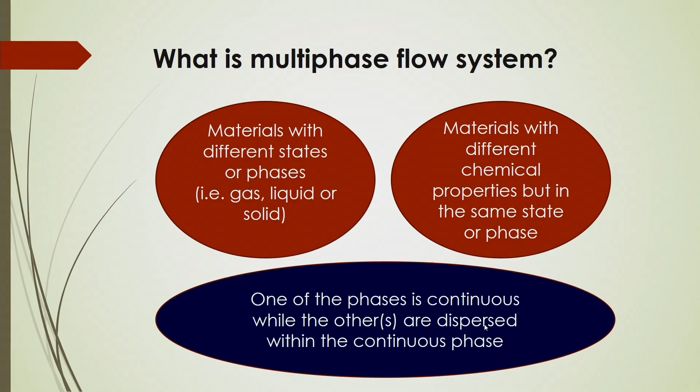In this case, remember that whenever we process any chemical engineering system where multiple phases take part, one of the phases is continuous while the others are dispersed within the continuous phase. For example, if gas is dispersed in a continuous liquid phase, then gas is the dispersed phase and liquid is the continuous phase.

In gas-liquid processes like absorption or gas-liquid reactions, these two phases take part. But if these two phases occur in the presence of a solid catalyst, then there will be a three-phase flow.

In that case, two phases may be discrete, like gas and solid particles, whereas liquid will be the continuous phase. So in any multi-phase flow system, one phase should be discrete and another continuous. We can divide multi-phase systems into two-phase systems and three-phase systems.

Two-phase systems are not only gas-liquid; there are others like liquid-solid and even gas-solid systems. So two-phase systems include gas-solid, liquid-solid and gas-liquid, while three-phase systems are gas-liquid-solid. Gas or liquid acts as the continuous phase in particular processes, while gas or solid acts as the discrete or dispersed phase.

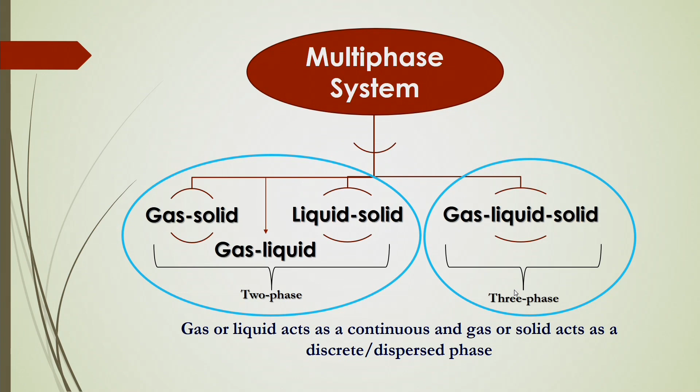Sometimes if liquid is sprayed as a dispersed phase of droplets in a gaseous medium, then liquid droplets are the discrete phase and gas is the continuous phase. So gas phase may be either continuous or discrete depending on the application. Let us look at some applications of these different multi-phase flow systems.

Gas-liquid flow systems: here gas is used as the dispersed phase and liquid as the continuous fluid, such as absorption of gas in liquid to remove it from a gaseous mixture. Example: mixtures of COx, NOx or hydrogen sulfide etc. from polluted air into a solvent.

Other examples include ozonation of arsenic to arsenate, or removal of ammonia or dye in water treatment. Gas-liquid operation is important here, along with other applications like gas-liquid chromatography for analysis of liquid petroleum fractions, where both gas and liquid take part in the analysis.

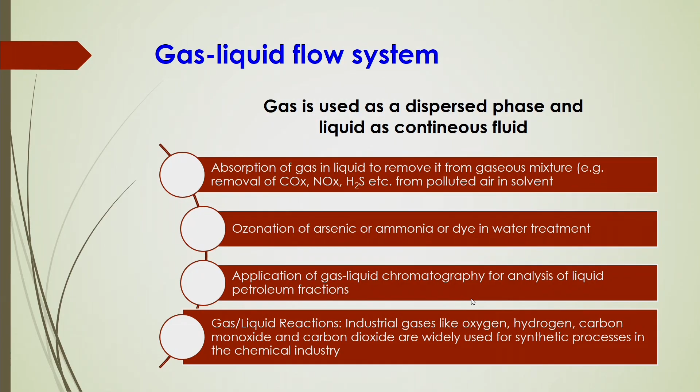Even gas-liquid reaction processes use industrial gases—oxygenation, hydrogenation, carbon monoxide and carbon dioxide processes—which are widely used for synthetic processes in the chemical industry to produce different types of hydrocarbons. So gas-liquid systems are important.

Liquid-gas systems: here liquid is used as the discrete fluid and gas as the continuous fluid. For example, in a spray column, liquid is sprayed into a gaseous medium for absorption of gas, and spray towers can be very effective in removing pollutants if the pollutants are highly soluble in the liquid.

Also, in the production of superphosphate used in manufacturing fertilizer, liquid is used as a discrete phase, and in the production of silicon tetrafluoride and hydrogen fluoride, gases are vented from various points in the process—these are gas-liquid operations used for producing superphosphate fertilizer, silicon tetrafluoride and hydrogen fluoride gases.

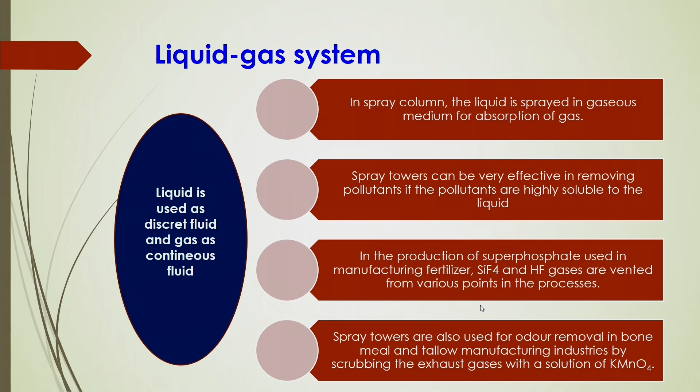And the spray towers are also used for odor removal in the bone meal and tallow manufacturing industries by scrubbing the exhaust gases with a solution of potassium permanganate. So, these are some applications where liquid and gas will be taking part. In that case liquid will be the discrete and gas will be the continuous phase.

In the gas solid system, you will see there are several applications. In chemical engineering processes, it can be said that gas solid operations are the most important and diverse applications in the chemical industry. There are several processes, like physical processes and even some reactive processes, gas solid reactions. In physical processes like drying of particles, fluidization operation is very important.

Coating of surfaces, granulation, even heat treatment, and also filtration, blending and segregation or classification of the solid particles in fluidized bed. So, these are actually gas solid operations. Also in gas solid reactions like roasting of ores, combustion of coal to produce different types of hydrocarbons, even for power plant operation to produce the power.

Of course, this coal is combusted and different types of gaseous products are coming out, and those gaseous products are separated and used for several purposes. Sometimes steam is produced just by burning coal, and that steam is used for the production of power by rotating the turbine. So, in that case gas solid operation is important, and also calcination of limestone, phosphates, even aluminum hydroxide, fluid coking etc. For that these gas solid operations are very useful.

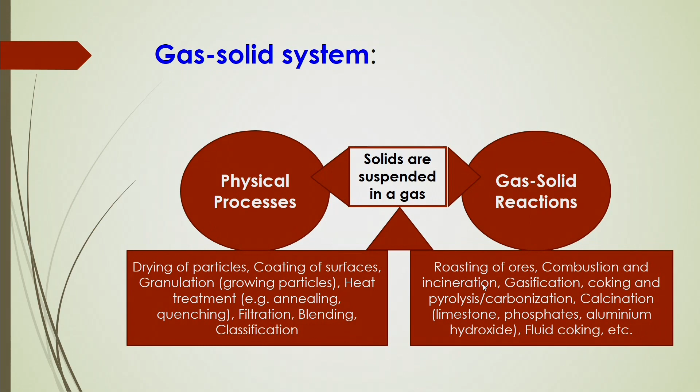And also the liquid liquid system, there are several applications for this system also. Liquids are used as both discrete as well as continuous phase, like the flow of emulsion of oil and water in pipelines. Different types of contactors like packed beds, packed columns, pulsed columns, and stirred tank reactors in various applications where liquid liquid systems are important.

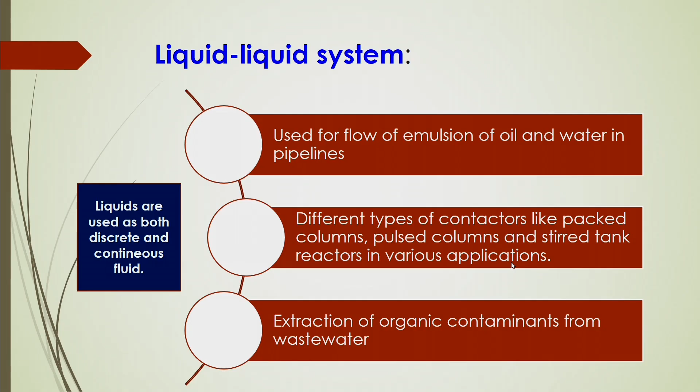Also liquid extractions, solvent extractions to remove the contamination from the wastewater, the extraction of the contaminants by another liquid component or organic liquid, that is also important. So, liquid extraction is also important just to remove some contaminants from the wastewater or some other liquid medium where it will not be useful.

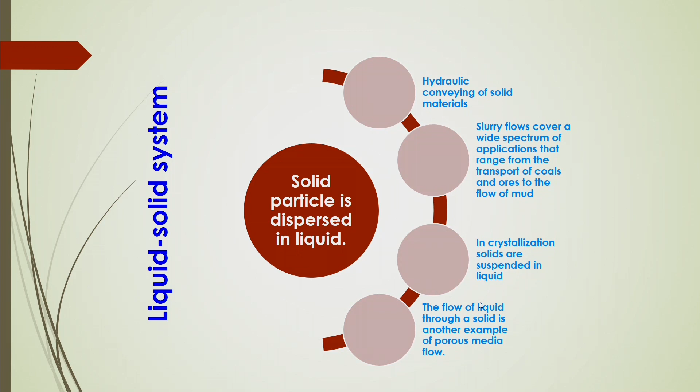And the liquid solid system, where hydraulic conveying of solid materials is important, and in that case solid particles are dispersed in liquid, and slurry flows cover a wide spectrum of applications that range from transport of coals and ores to the flow of mud. And also in crystallization you will see solids are suspended in liquid, and the flow of liquid through a solid is another example of porous media flow. So, these are the operations for the liquid solid system.

In three phase systems you will see gas liquid solid systems. In the mineral industry, flotation is one of the important processes by which valuable metals will be separated from the ores. During that flotation, aeration is being done, and during that aeration gas, liquid and solid, all three phases will be taking part.

And also sometimes some fine particles are to be removed from the muddy water, or milk water, where solid particles are suspended. To separate those fine particles, this flotation process is also important. In that case surfactants, frothers are to be used, so that in flotation these fine particles will be separated by aeration. So, in that case gas, liquid and solids, three phases are taking part.

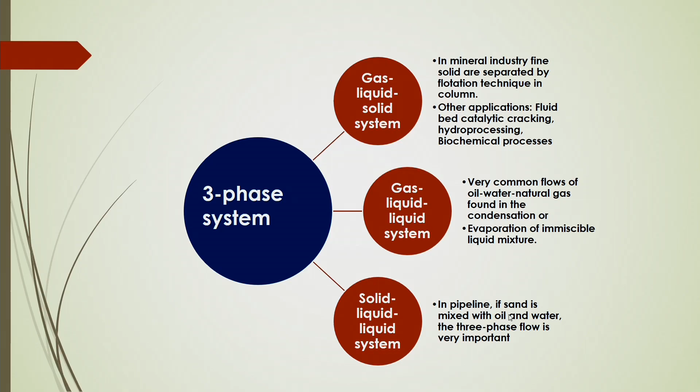Other applications like fluid bed catalytic cracking in presence of catalyst particles, hydrocracking, hydroprocessing and biochemical processes are involved in three phase systems. And very common flows of oil, water, natural gas are found in condensation or evaporation of immiscible liquid mixtures. There also gas liquid liquid systems are important, and solid liquid systems you will see in pipelines. If sand is mixed with oil and water, the three phase flow is important there. So, these are the various applications of the three phase systems.

And four phase systems also, one application is the freeze desalination process. When butane liquid is added into saline water, that results in formation of ice crystals, and in this case the system is a mixture of butane liquid, water, ice and butane vapor.

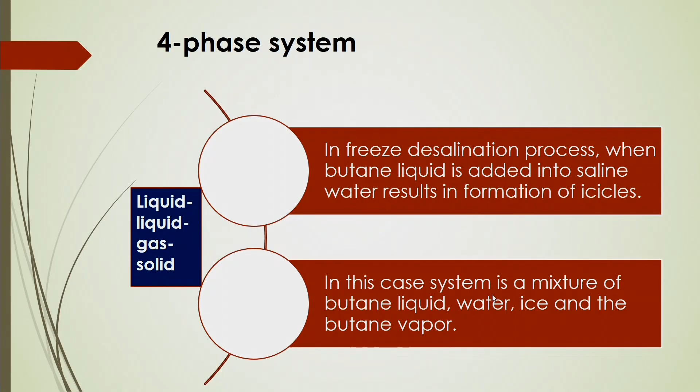These four phases are there, so that is why four phase systems are considered. So, we have then seen different applications of four phase systems in our daily life. Whatever products we are getting, all processes by which these products are coming out are related to multi-phase flow systems, whether it is gas liquid or liquid solid or gas liquid solid system, even gas liquid solid and vapor system; all are directly or indirectly related to their particular processes.

So, based on these multi-phase flow processes, whenever we are going to perform these processes in a particular unit, that process can be intensified based on the development of the unit or equipment, or based on the fundamental phenomena, even the fluid phenomena, based on the equipment size, based on the policy. So, we can intensify the process in different aspects. So, in this lecture we will discuss, based on these multi-phase flow systems, the different mechanisms of process intensification which are being used in industry.

So, flow based process units for intensification: some important chemical engineering process units for process intensification are like the trickle bed reactor, where liquid phase and gas phase are flowing through the packed bed, and the liquid phase will be flowing as a laminar stream, called trickle phenomena. So, that is the trickle bed reactor. In that case you will see plug flow phenomena, and then reaction efficiency or process performance will be higher than the conventional processes.

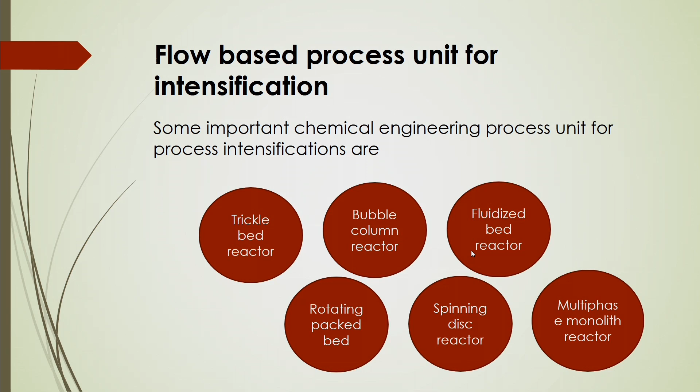So, these are the various process equipments for process intensification which are being used in chemical engineering processes. And you will see flow based process units for intensification, like heat integrated reactors; for high temperature, millisecond contact time and catalysis are also important for this process intensification. Micro engineered reactors are being developed nowadays for chemical engineering processes. Monoliths as biocatalytic reactors are developed as a process intensification.

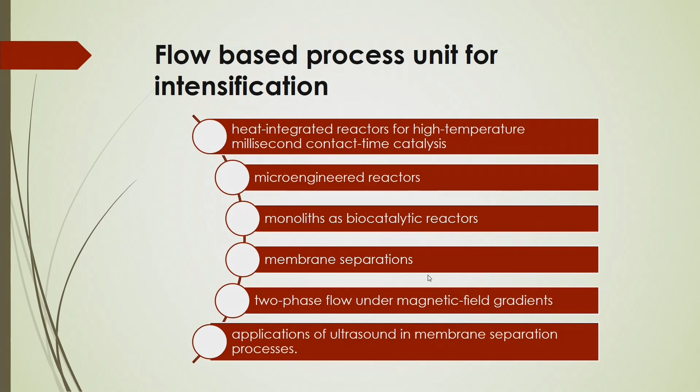Membrane separations nowadays are widely used in chemical engineering processes for separation of particles. Even nano sized particles are being separated by these membrane separation processes. So, this is also one important intensified process. Two phase flow under magnetic field gradients is also important there. Applications of ultrasound in membrane separation processes are nowadays in the research stage for chemical engineering processes.

Various mechanisms, like slurry bubble column reactors, create more interfacial area between phases to enhance the mass and heat transfer. So, the slurry bubble column reactor is one important process intensified unit based on the multi-phase flow system. Fluidized bed reactors give better heat and mass transfer in gas solid flow, and also rotating disk packed beds give better mass transfer, well mixed liquid and gas phases, high interfacial surface area, and you can even operate them in counter current mode. So, these are some basic mechanisms based on which multi-phase flow process intensified units are developed

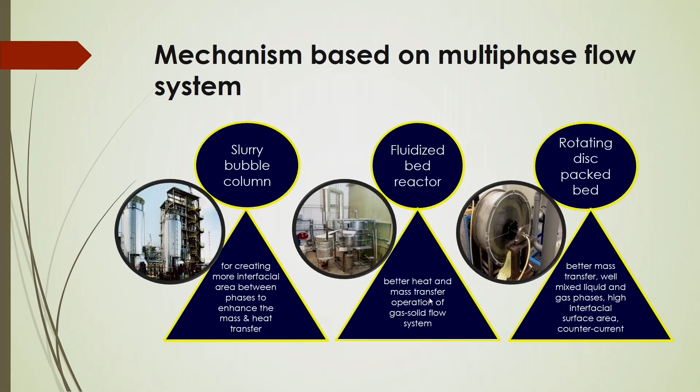for chemical engineering processes. You will also see compact heat exchangers, where reducing channel size gives better power generation. By surface enhancement with metal coated polymer foam for micro power generation, foam heat exchangers are developed, and based on increased residence time and better phase mixing, downflow or inverse flow reactors are nowadays coming to get more contact time and more residence time of the phases in the reactor.

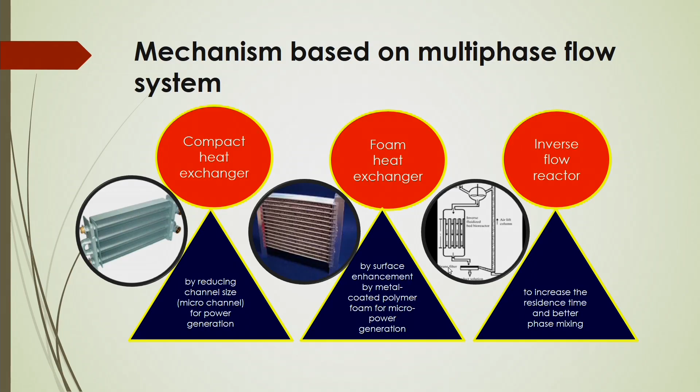Membrane distillation is one of the important integrated systems where the transport mechanisms are Knudsen diffusion, Poiseuille's flow and molecular diffusion. All these processes happen simultaneously, and the thermal boundary layer is considered to be the mass transfer controlling factor in this membrane distillation process. Liquid membrane systems are also important, where diffusion is enhanced in liquids rather than solids. Transport rates are several orders of magnitude higher than in solid membranes, because diffusion is faster in liquids compared to solids.

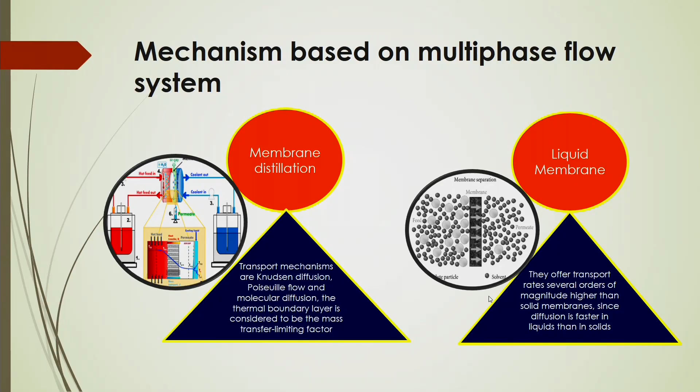Reactive separation is also important nowadays, because in fluid systems reaction and separation are combined in a single unit, and chemical process industries follow this integrated system to have favorable economics for carrying out reaction simultaneously with separation for certain classes of reacting systems. Many new processes called reactive separations are carried out, like methyl acetate production, where both reaction and distillation happen in a particular column.

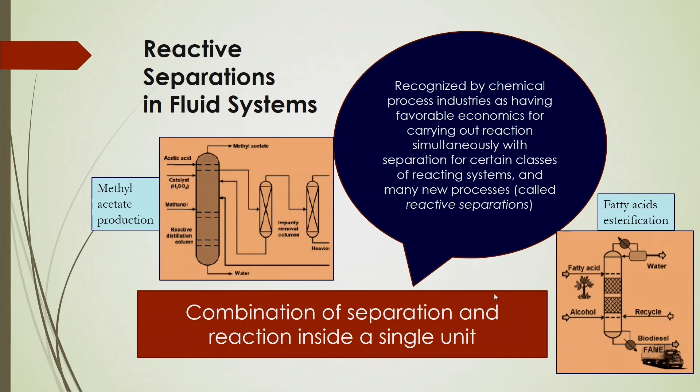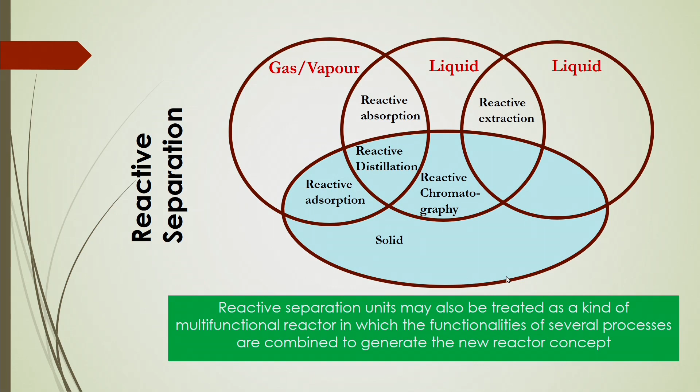So, you can say that in multi-phase flow systems, different chemical engineering processes can be intensified for a particular reaction based on a combination of unit operations, like reactive separation, reactive distillation, reactive extraction. And the feasibility of the reactive separation depends on various parameters like mechanical design, chemical reaction, and even separation performance.

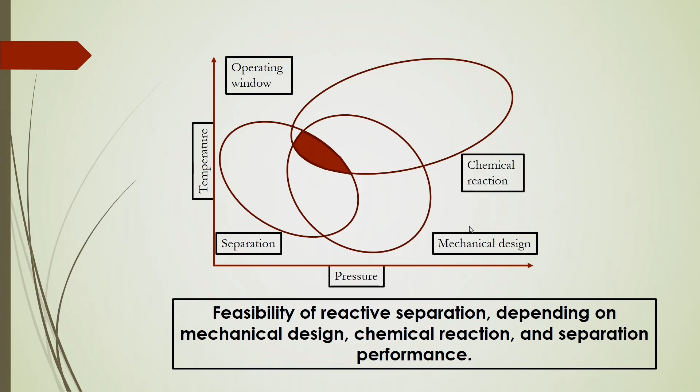So, in this diagram you will see, at a particular temperature and pressure, how chemical reactions are taking place for a particular process intensification, and how mechanical design will give you process intensification for that particular operation. So, we can say that any reactive separation process depends on mechanical design, chemical reaction performance, and separation performance.

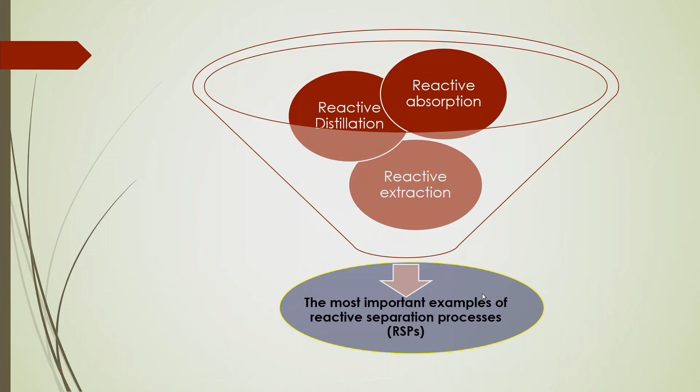The most important examples of reactive separation processes are reactive distillation, reactive absorption, and reactive extraction. A common feature of reactive absorption, distillation, and extraction is that these processes involve at least one liquid phase, the properties of the liquid state become significant, and they occur in moving systems. Thus, the process hydrodynamics play an important role, because all the process performance depends on the mixing processes,

and other particle interactions, like gas bubbles and solid particles, solid-solid interaction, gas-particle interaction, and bubble interactions like bubble coalescence and bubble breakup. If you have more breakup of the bubbles, you can produce finer bubbles, so that you get more interfacial area. If your process is more prone to bubble coalescence, performance will be less.

So, you have to design a unit in such a way that some mechanical provision is placed, so that breakage of the bubbles occurs, the bubble flow is uniform, and interfacial phenomena are created so that there is uniform mixing and distribution of the phases, giving better performance of the reaction and processes. So, the properties of the liquid state also become significant there.

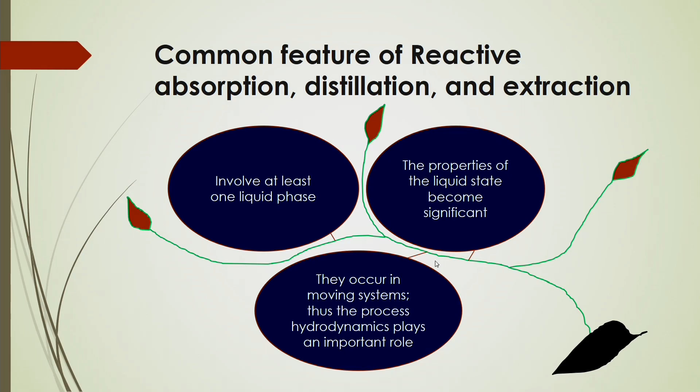So, the properties of the liquid state should be considered for that particular process intensification, and how to control the hydrodynamics. If there is a heterogeneous mixture, to make it homogeneous and get better performance, you have to make provisions. Sometimes, to reduce back mixing, you have to use a baffle, or design the unit as 2-dimensional, or use a microstructured system, so that back mixing will be reduced.

So, to get reduced back mixing, you can intensify the process just by operating it as a plug flow reactor, because plug flow will give you better performance of the reactions and other physical operations. These processes, the reactive separations like absorption, distillation or extraction, are based on the contact of at least two phases.

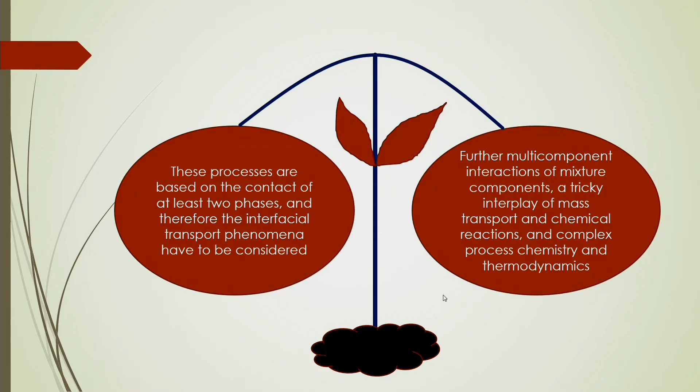So, for mass transfer through the interfacial area, of course two phases should be involved, and therefore the interfacial transport phenomena have to be considered for your process intensification. And also the multi-component interactions of the mixture components, a tricky interplay of mass transport and chemical reactions, and complex process chemistry and thermodynamics should be considered. Those are involved in that particular process intensification.

Now, let us consider some features of reactive distillation. There are complex interactions between chemical reaction and separation based on the phases, and the performance is influenced by the size and location of the reactive and non-reactive column. Also, reflux ratio is one of the important parameters, along with feed location and throughput, by which you can change the hydrodynamics in the column for the reactive distillation system.

Like esterification and hydrolysis reactions which are catalyzed by acidic ion exchange resins like Amberlyst 15, one of the important resins, in which reaction as well as separation happens in a particular unit.

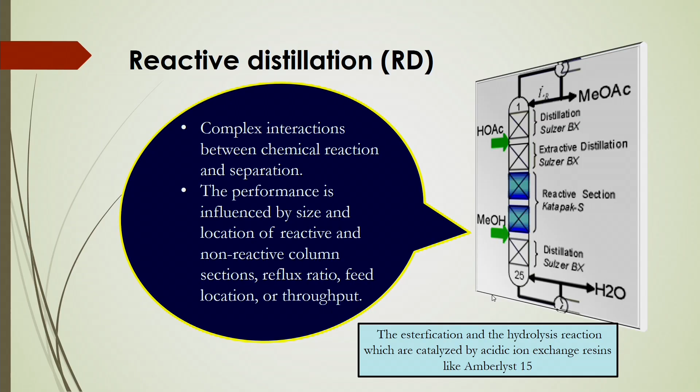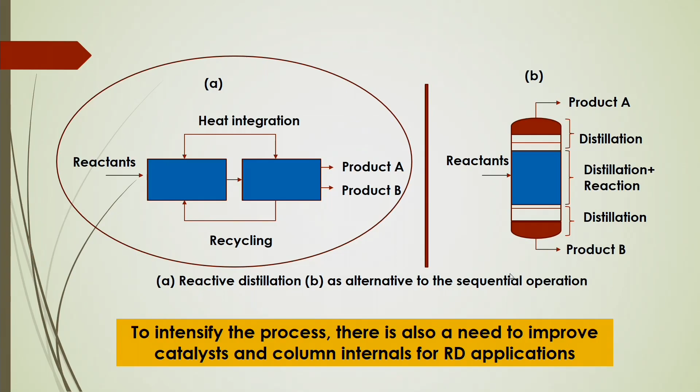So, in that particular unit, in some zone distillation and reaction both happen, and after that the distillation process happens in that unit. So, to intensify the process, there is also a need to improve the catalyst and column internals for reactive distillation applications.

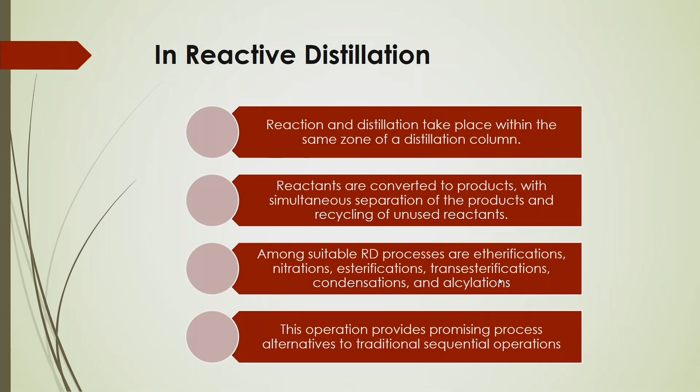And reaction and distillation take place within the same zone of a distillation column, and reactants are converted to products with simultaneous separation of products and recycling of unused reactants. Among suitable reactive distillation processes, etherifications, nitrations, esterifications, transesterifications, condensations and alkylations are the most common applications. This operation provides promising process alternatives to traditional sequential operations.

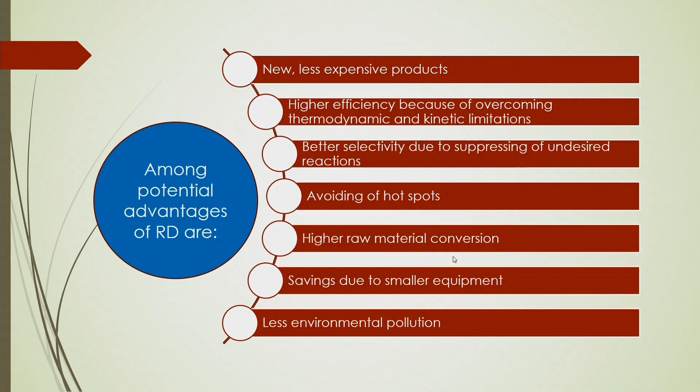Now, what are the advantages for which reactive distillations are carried out in a single unit? Less expensive products, avoiding hot spots, savings due to smaller equipment, less environmental pollution, higher efficiency because of overcoming thermodynamic and kinetic limitations, and better selectivity by suppressing undesired reactions. These are some potential advantages of the reactive distillation system.

In case of reactive absorption, here is an example: carbon dioxide absorption in liquid. Suppose air and carbon dioxide mixtures are supplied from the bottom of a packed bed reactor. Water and sodium hydroxide solution is used as the liquid, and through that liquid in the packed bed the air plus carbon dioxide mixture is supplied. Parallelly, reaction as well as absorption happen, giving sodium carbonate and water, and the air comes out from the top of the packed bed as clean air.

So, if we use sodium hydroxide for absorption of carbon dioxide, reaction as well as absorption both happen. Sodium hydroxide and carbon dioxide react to give sodium carbonate solution, and that sodium carbonate will be used for other applications. So, the scrubbing of carbon dioxide happens from this air carbon dioxide mixture, and clean air comes out from the top of the column.

Even for absorption of stack gases like a gas plus sulfur dioxide mixture, to remove the sulfur dioxide, if you use calcium carbonate in a solid medium, calcium carbonate reacts with sulfur dioxide to give calcium sulphate, which is precipitated, and the remaining solution is reused, and carbon dioxide without sulfur dioxide comes out as a gas. So, you can purify that gaseous mixture of sulfur dioxide or stack gases by this reactive absorption.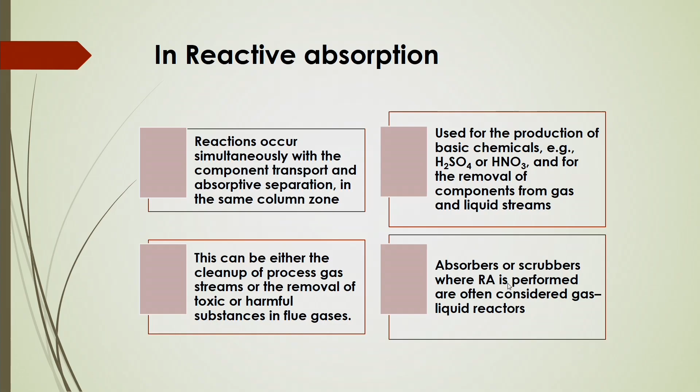So, reactive absorptions perform both reaction and absorption, and can be realized in a variety of equipment types: film absorbers, plate columns, packed units, and bubble columns. This process is characterized by independent flow of both phases, which is different from distillation, and this permits both co-current, like downflow and upflow, and also counter current operations.

This reactive absorption can be intensified either by absorber reactors or by designing different types of columns like plate columns, packed columns, bubble columns, even intensification of bubble columns in 2 dimensions and 3 dimensions, downflow bubble columns, bubble columns with baffles, and use of spargers to produce finer bubbles. So in that direction also you can intensify bubble columns.

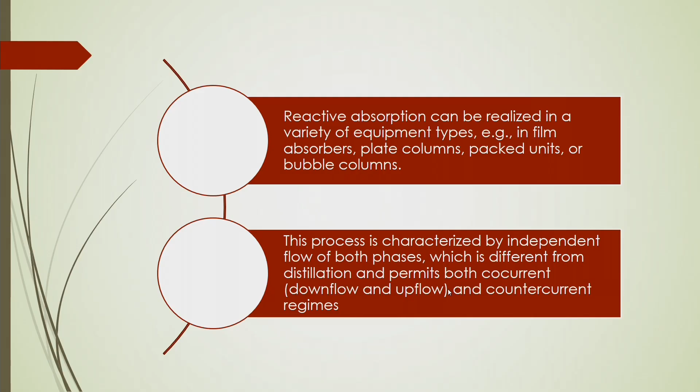This process can be characterized by different modes of operation. You can use a downflow system to increase mixing as well as residence time of the phases, and upflow systems where the first reaction is carried out. Countercurrent operations are also important where you see physical separation, or mass transfer operations for mineral processing.

Reactive absorption represents a process in which there is selective dissolution of gaseous species by a liquid solvent phase, combined with chemical reactions. Compared to purely physical absorption, reactive absorption does not necessarily require elevated pressure and high solubility of the absorbed components, because the chemical reaction shifts the equilibrium state favorably, resulting in enhanced solution capacity.

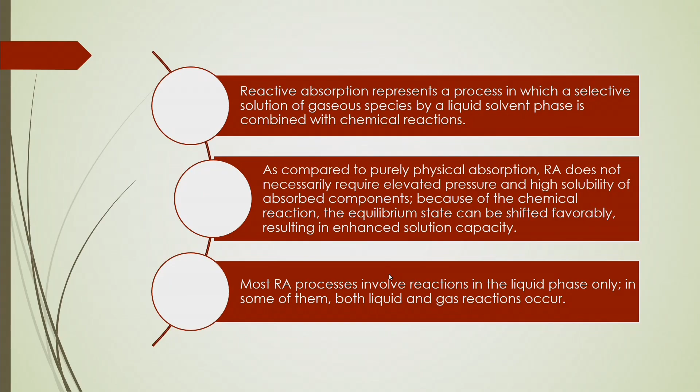Most reactive absorption processes involve reactions in the liquid phase only, and in some cases both liquid and gas act as the reaction medium. So the medium, the mode of operation, and discretizing the system are also sometimes ways to intensify the process.

In reactive extraction, both reaction and extraction happen together. This reactive extraction uses liquid ion exchangers that promote a selective reaction or separation, and the solutes are very often ionic species like metal ions, or organic or inorganic acids, or intermediates like furfural, phenols, etc.

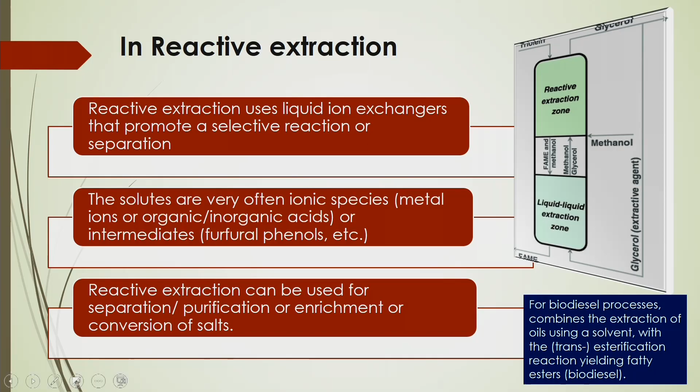Liquid-liquid extraction is sometimes based on the partial miscibility of liquids. So you have to derive some liquids where immiscibility will be present, but the separability capability of those liquids will be enhanced. Both immiscibility as well as the absorbance of contaminants in that particular liquid should be increased.

In the simplest extraction system, two compounds have to be separated, and this can be done by extracting with a carefully selected solvent in which one compound, called the solute, easily dissolves, whereas the other does not. As an example, propionic acid can be separated from water, or wastewater, using paraffin or an organic compound like octanol or decanol.

Decanol and water are immiscible, and propionic acid is miscible with water. So the propionic acid mixed in water can be separated by decanol. This decanol and water should be immiscible, and there should also be selectivity based on boiling point. You have to use organic compounds with a boiling point significantly different from propionic acid, so that after extraction, the propionic acid in decanol can be separated just by distillation.

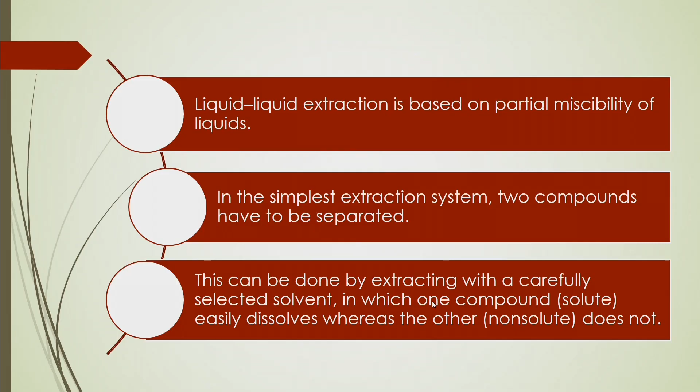This is related to the droplet phenomena - if you produce finer droplets, you get more interfacial area, so extraction will be more efficient and mass transfer will be better. This reactive extraction process depends on your design, and how to produce finer droplets and select the proper solvent.

To produce finer droplets, you have to design units like mixer settler systems, with mechanical provisions so that more turbulence and interfacial area are produced. Column extractions also help get more interfacial area between liquid and liquid for better extraction. Even centrifugal extractors are being developed for process intensification of extraction.

In centrifugal extraction, centrifugal force is applied to separate liquid contaminants into another liquid through the action of gyration, making a thin film of immiscible liquid, so that through that thin film, mass transfer is more efficient.

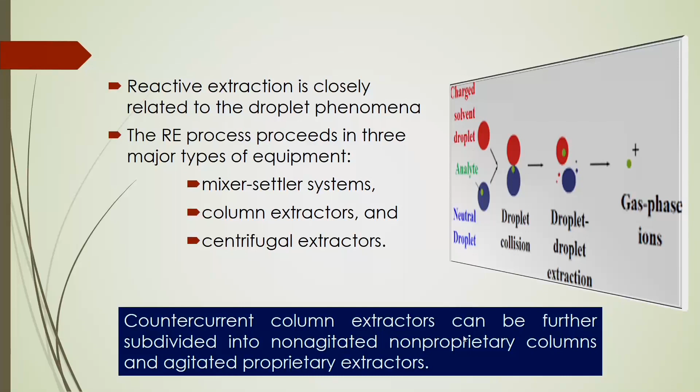Counter current column extractors can be subdivided into non-agitated, non-proprietary columns and agitated proprietary extractors. Counter current operations are designed economically so that without making droplets, you can increase extraction efficiency, save energy, and make operations easier to handle. This is why counter current column extractors are important for intensification of the extraction process.

In the extraction process, various forms of energy input are required, like rotation of propellers, impellers, disc propulsion, pulsation, vibration, ultrasonic devices, and centrifugal devices. To run this equipment for process intensification of extraction, you need various forms of energy.

Agitating the liquid-liquid system breaks it into droplets - using this energy you can increase the droplets and the interfacial area, so you get better mass transfer of extraction. Increasing droplets through this energy increases interfacial area to improve mass transfer and column efficiency.

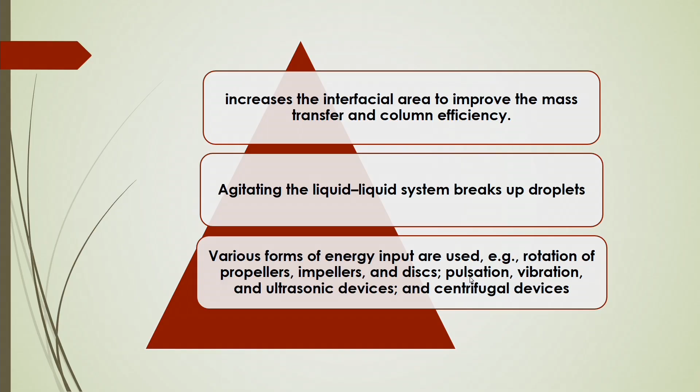Another important intensification process for multi-phase systems is the development of micro reactors and micro channel based heat exchangers. Multi-phase based micro reactors have potential for rapid heat and mass transfer. This enhancement of transport processes is related to the decrease of diffusion paths at the micro scale. For fast multi-phase reactions, these are very important, and the rate and selectivity of the chemical process can be greatly influenced by transport of reagents within the phases.

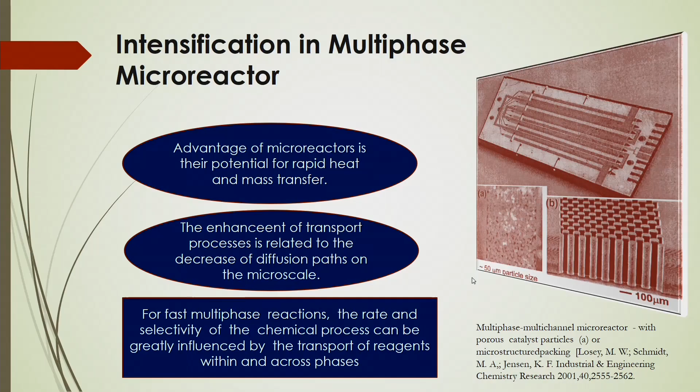A variety of different purposes are fulfilled based on the application and requirement of high heat and mass transfer coefficients in micro reactors. In micro reactors we get well defined flow patterns, whereas heterogeneous flow patterns with back mixing are sometimes seen in column reactors.

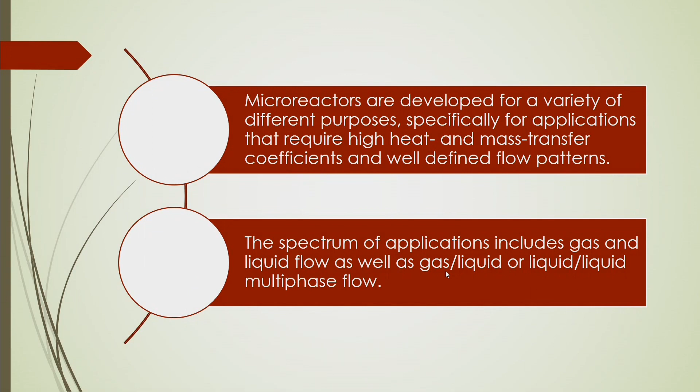Micro reactors are used to avoid back mixing. Micro channel based slug flow or plug flow patterns are the mechanisms used for process intensification. The spectrum of applications includes gas and liquid flow as well as gas-liquid or liquid-liquid multiphase flow systems in micro reactor systems.

So why this intensification from macro to micro reactor? When comparing processes in micro reactors with conventional systems, a few general differences can be identified: flow in microstructures is usually laminar, in contrast to turbulent flow patterns on the macro scale, and the diffusion paths for heat and mass transfer are very small, making microreactors ideal.

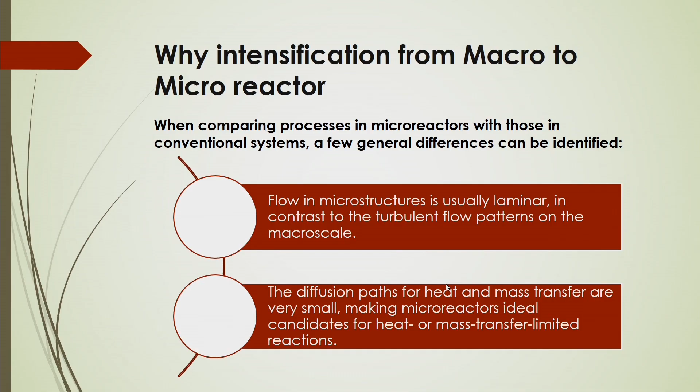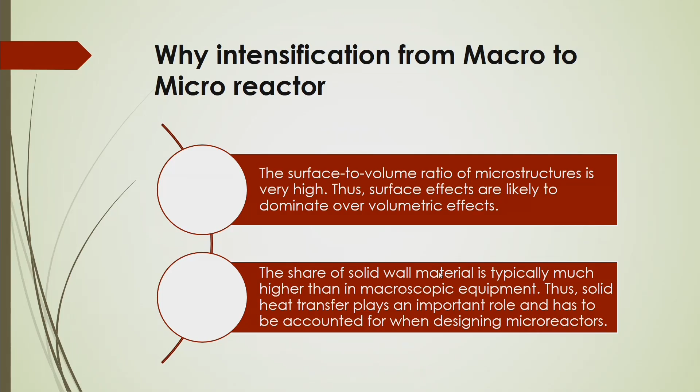Microreactors are very convenient for heat and mass transfer limited reactions. The surface to volume ratio in microstructure reactors is very high, so surface effects are likely to dominate over volumetric effects. The share of solid wall materials is typically much higher than in macroscopic equipment, so solid heat transfer plays an important role and must be accounted for when designing microreactors.

Using silicon microfabrication, it is possible to construct packed bed microreactors that provide a 100-fold or more improvement in mass transfer for gas-liquid heterogeneously catalyzed processes such as hydrogenation of unsaturated hydrocarbons. This is reported by Losey et al. in 2001, who demonstrated this hydrogenation in multiphase, multi-channel microreactors.

In these devices, standard catalyst particles of 50 to 75 micrometer diameter are retained in silicon channels by an integrated microfabricated filter unit. A specially designed gas-liquid inlet section with narrow channels provides rapid contact of the gas and liquid reagents. To achieve uniform flow in the microreactors, pressure drops in the inlet gas and liquid sections are higher than those in the individual reactor channels.

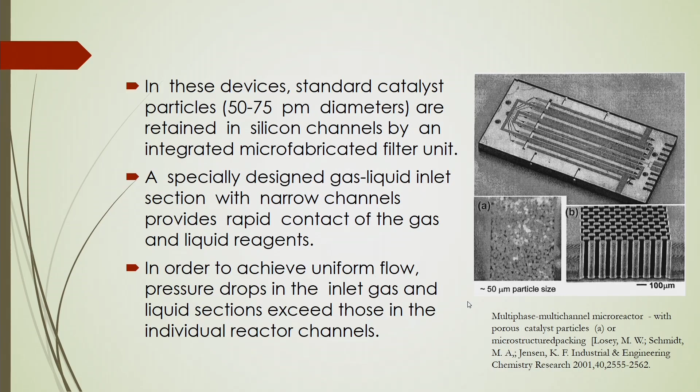So though it has higher pressures, it still has some advantages to get more efficient reactions. The small particles provide high surface area for improved gas-liquid mixing, but they also represent a challenge in terms of pressure drop and fluid distribution among the parallel channels.

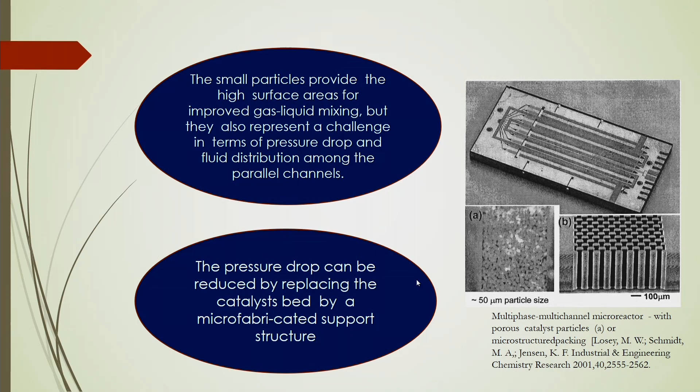The pressure drop can be reduced by replacing the catalyst bed with microfabricated support structures. Uniformity of the structured packing arrangement is also important, as it gives control over the fluid flow, enhancing performance relative to micro packed beds. The activity is greatly enhanced if the catalytic component is supported upon a porous layer formed by making the silicon posts porous.

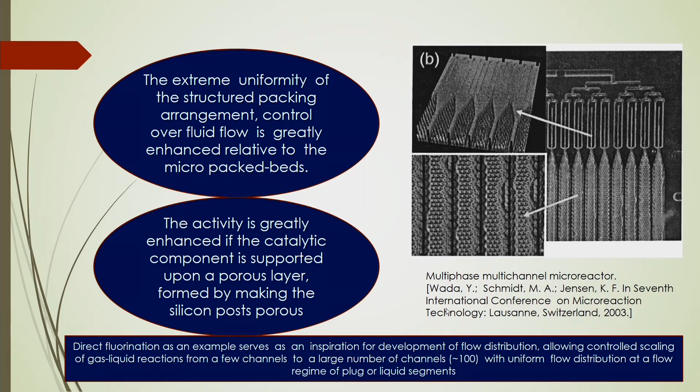Direct fluorination, as an example, can serve as inspiration for development of flow distribution, allowing controlled scaling of gas-liquid reactions from a few channels to a large number of channels, like 100 channels, with uniform flow distribution at a flow regime of plug or liquid segments.

Another important intensification approach is changing the geometry of the channel. In some cases, when large residence times are desired, comparatively long micro channels need to be integrated in a curved shape. In addition, straight channels are often not suited for connecting a microflow domain to the external world, so curved flow is made instead.

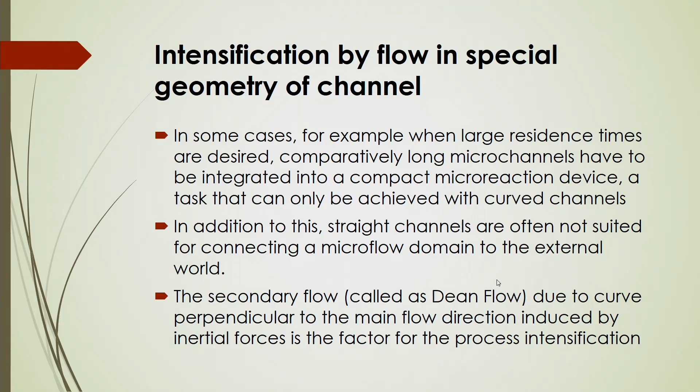Whenever you create a curved flow, there will be a creation of secondary flow called Dean flow, due to the curve perpendicular to the main flow direction, induced by inertial forces, which is the main factor for this process intensification.

The typical secondary flow pattern in a curved channel is given by two counter-rotating vortices separated by the plane of curvature. The strength of these vortices increases with increasing Dean number, where this factor, the Dean number, is represented by the Reynolds number multiplied by the square root of dH by R, where dH is the hydraulic diameter of the curved channel and R is the mean radius of curvature of the channel.

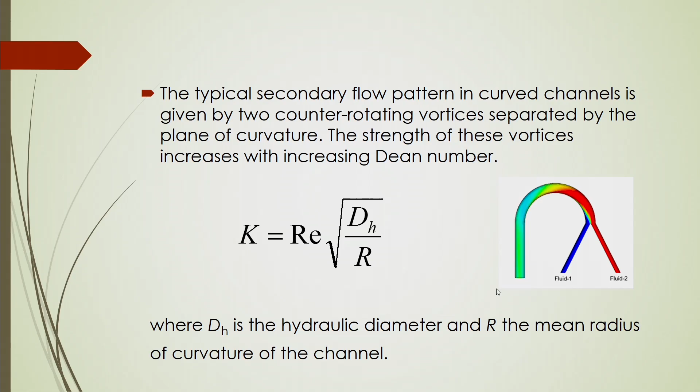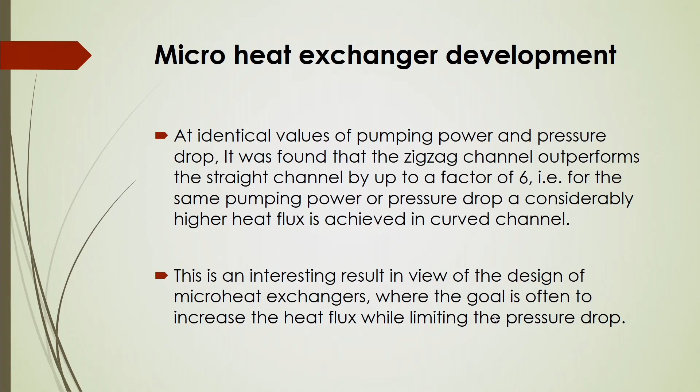Some other intensified units include micro heat exchanger development, where the design goal is often to increase the heat flux while limiting the pressure drop. For the same pumping power or pressure drop, a considerably higher heat flux is achieved in the curved channel, so curved micro channel based heat exchangers are developed in that direction.

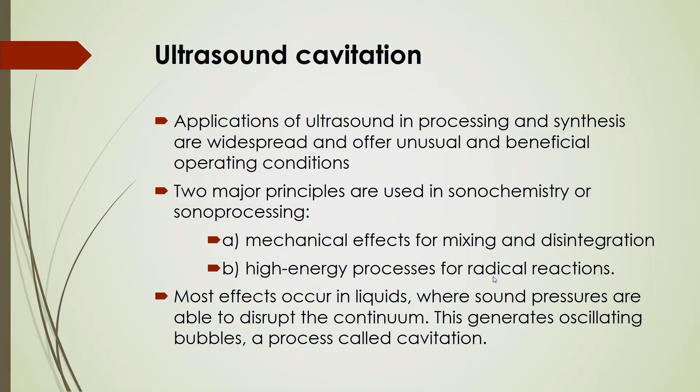Another intensification technique is ultrasound cavitation. Application of ultrasound in processing and synthesis is widespread, often enabling unusual and beneficial operating conditions. Two major principles are used in sonochemistry: mechanical effects of mixing and disintegration, and high energy processes for radical reactions. Sound pressures are sometimes developed to produce cavitation to get more interfacial area.

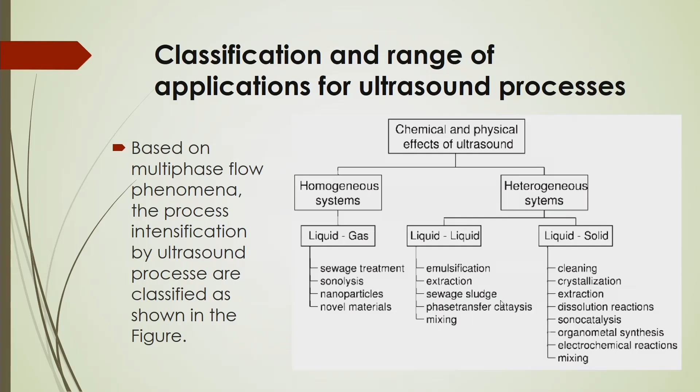So in this lecture we have gone through the different mechanisms of process intensification for chemical processes, which are being intensified for particular process systems, and the different mechanisms involved in this process. I think it will be helpful for further understanding of process intensification in chemical engineering processes, so I would suggest you go for further reading.